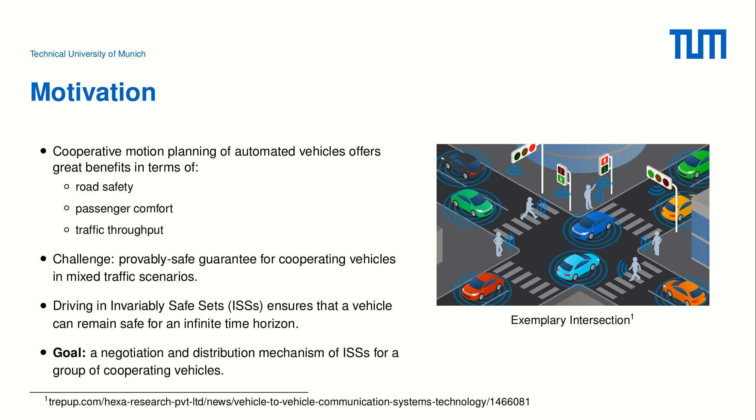Before proceeding to our method, we first introduce related definitions as preliminaries. In this work, the ISS of vehicles are computed over their individual reachable set, which is the set of all states that can be reached starting from an initial set of states. A state of a vehicle includes longitudinal and lateral positions, velocities, and accelerations in the road network.

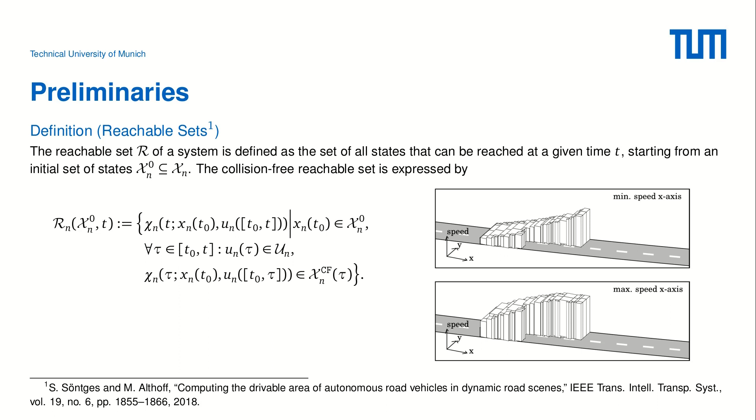The collision-free reachable set that does not collide with the occupancies of other traffic participants is expressed by the following formula. A snapshot of an exemplary reachable set is shown in the figure. The reachable sets of vehicles are projected onto the position domain to retrieve the longitudinal and lateral positions, which are called the drivable area. In the illustration, you may observe the drivable area of the ego vehicle over time, depicted by axis-aligned rectangles.

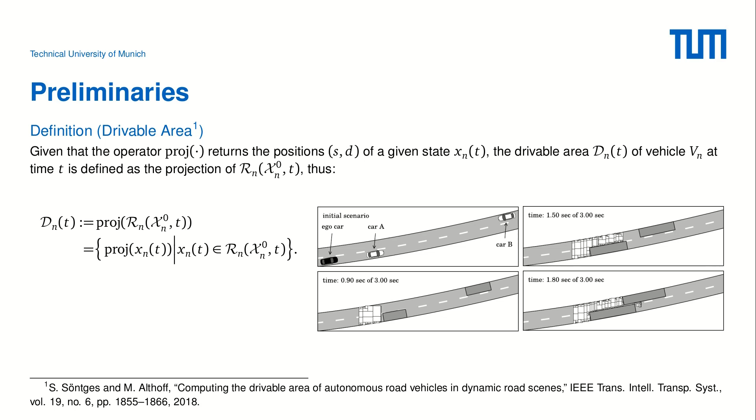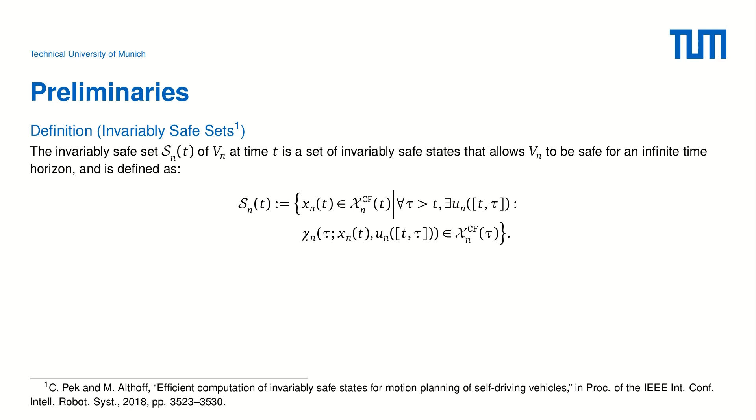Next, we introduce the notion of invariably safe sets. Consider the case that a vehicle is driving with a high velocity towards a static obstacle in near distance. Although the vehicle is in a collision-free state at the current time, it will eventually collide with the obstacle. To formally ensure its safety, we therefore require the vehicle to be at an invariably safe state. The ISS of a vehicle is the set of invariably safe states that allow the vehicle to remain safe for an infinite time horizon. In most cases, determining the maximal ISS is a computationally intensive task.

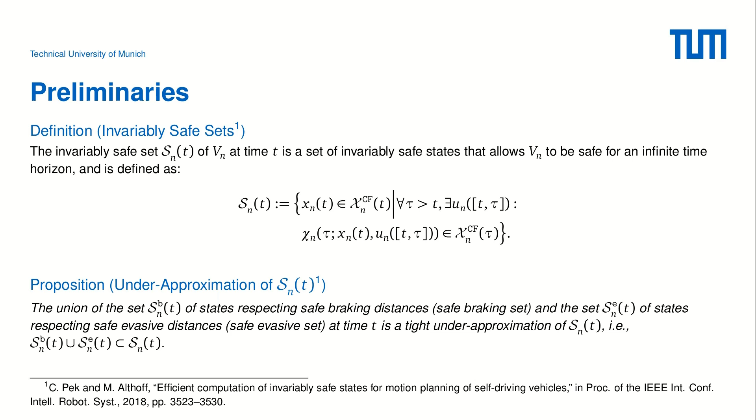Nonetheless, its tight under-approximation can be efficiently derived using sets of safe states that respect the safe braking distances and safe evasive distances respectively. These sets ensure the safety of the ego vehicle even if its preceding and following obstacles brake or accelerate with their maximal capability.

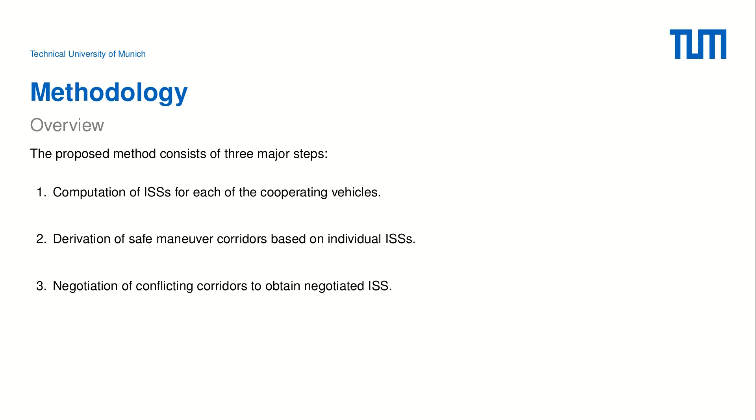Our method for provably safe cooperative driving consists of three major steps. Step 1: computation of ISS for each of the cooperating vehicles. In Step 2, we derive the safe maneuver corridors for vehicles based on their individual ISS. The potential conflicts of corridors are also examined in this step. Lastly, in Step 3, we negotiate and distribute the conflicting corridors so that in the end every vehicle obtains a negotiated ISS in which to plan their motion.

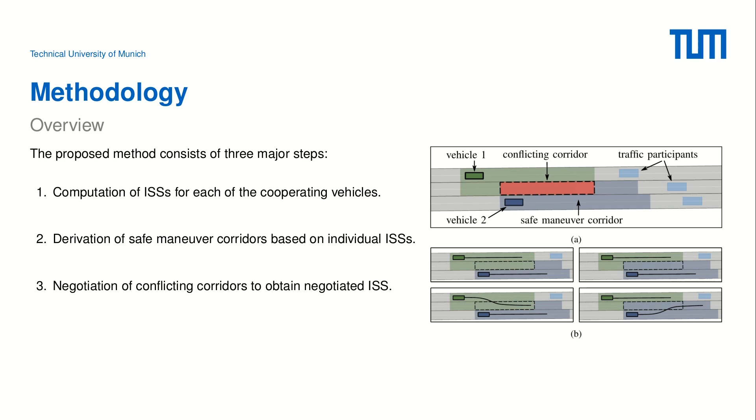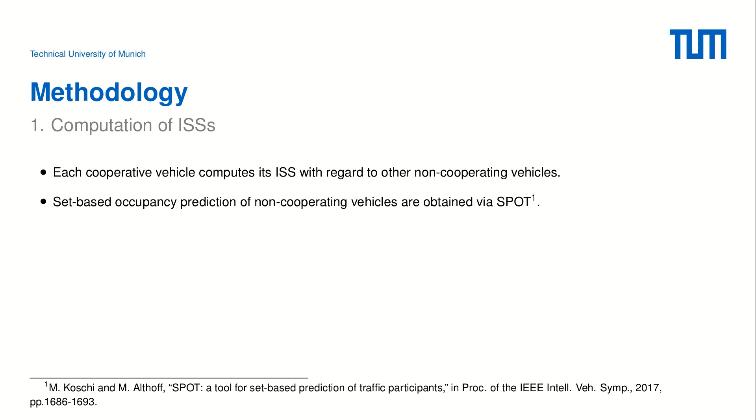The ISS of each cooperative vehicle is computed with regard to the future occupancies of other non-cooperating vehicles. These occupancies are obtained with the help of a set-based occupancy prediction tool named SPOT, which captures all feasible behaviors of other vehicles. Here we show the construction of the safe braking set and the safe evasive set for a vehicle driving in a lane.

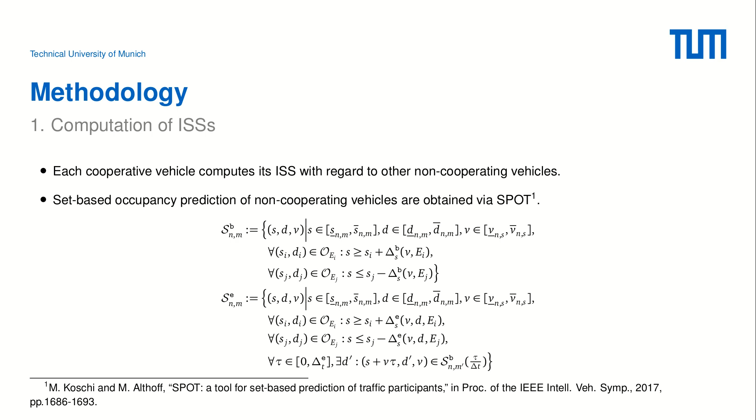This is better illustrated with a figure. A vehicle has a drivable area covering lanes 1 and 2. In lane 1, it has a preceding vehicle and a following vehicle. The boundaries of the safe braking set and safe evasive set are depicted with solid and dashed lines respectively.

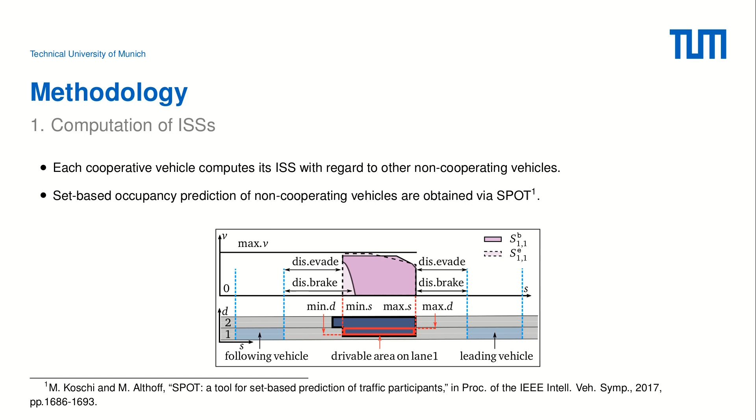The potential future collisions between the cooperative vehicles can be detected by examining the space and time required by the vehicles to perform safe braking or safe evasive maneuvers starting from their respective ISS.

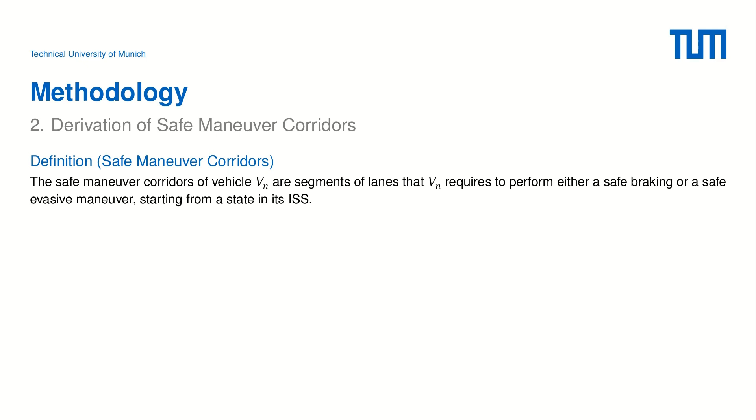This is referred to as their safe maneuver corridors, similar to the notion of a driving corridor, except that the initial state of such a corridor should be within the ISS. For computation efficiency in detecting conflicts, we obtained a bounding box of the computed safe maneuver corridors. In the figure on the right, the two vehicles have conflicts of maneuver corridors in the middle lane, which forbids them to perform an evasive maneuver.

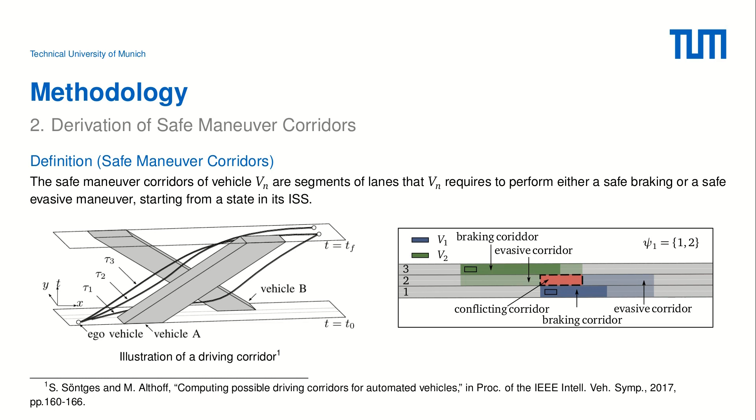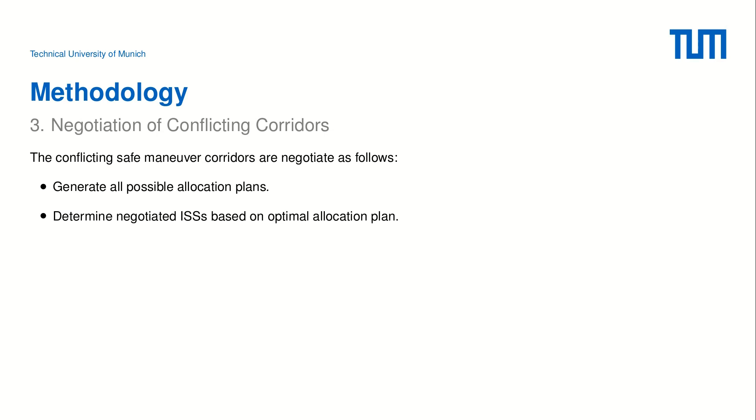Next, we explain the negotiation of conflicting corridors. Firstly, we generate all possible plans to allocate these corridors to vehicles. In this figure, two conflicts between three vehicles are detected. Note that the first conflict happens between vehicles 1 and 2, and a second conflict between vehicles 1 and 3.

By taking the Cartesian product of the coalitions, a total of 4 possible allocation plans can be generated. Each element in the plan denotes the winner of the corresponding conflicting corridor. Given an allocation plan, those states within the ISS of the losing vehicle whose safe maneuver corridor intersects with the allocated corridor shall be removed, resulting in a reduced negotiated ISS.

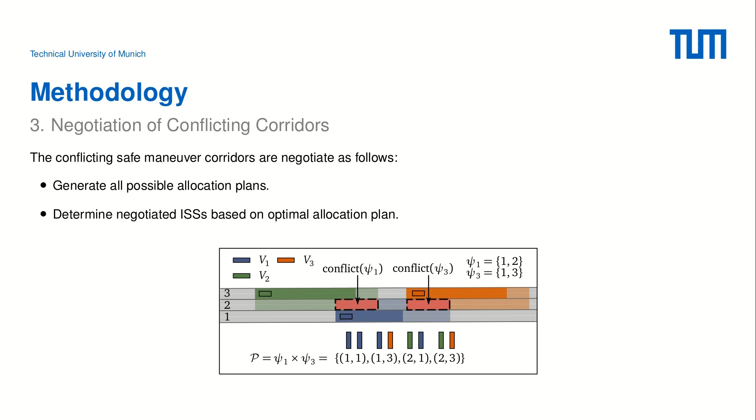After this, we compute the cost associated with each plan. The adopted cost function includes 2 terms. The first term represents the variance of the volumes of the negotiated ISS of vehicles with respect to Plan P, which reflects the fairness of the allocation plan. In the best case, this term equals 0, implying that all of the cooperative vehicles received equally large ISS.

The second term sums up the maximum length of the corridors of each vehicle, which promotes the overall advances in the driving direction. These 2 terms are associated with a user-defined weighting factor. After evaluating the cost of every possible plan, the one with the minimal cost is chosen as the optimal allocation plan.

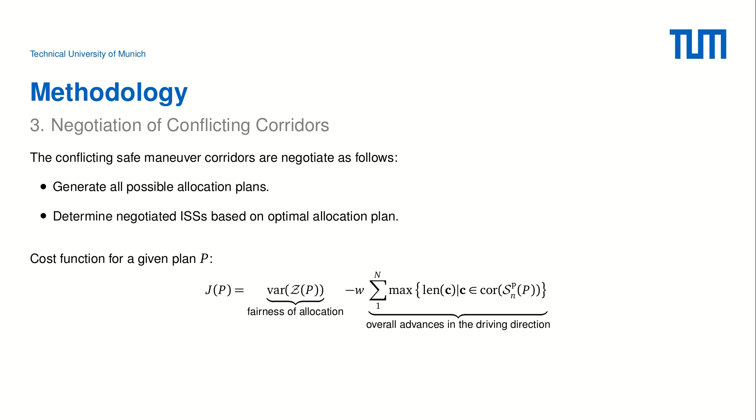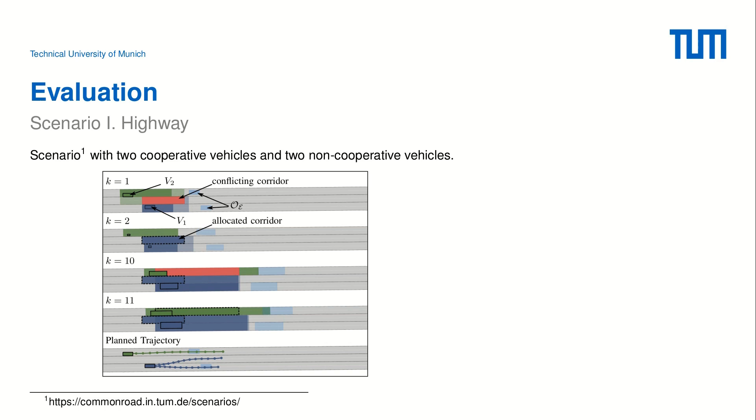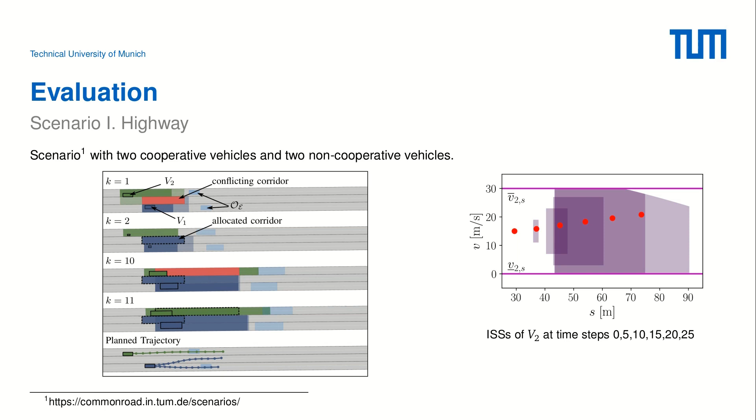The figure on the right visualizes the negotiated ISS and the states of the planned trajectories of vehicle 2. As can be seen, its states are all within the negotiated ISS, thus safety is ensured. Alternatively, one can only use the negotiated ISS in the last time step if the safety within the planning cycle is already ensured by the motion planners.

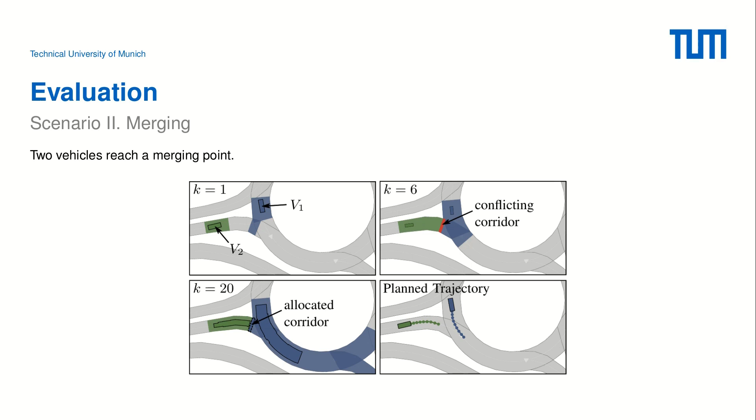In the second scenario, V1 and V2 approach a merging point at the roundabout. Note that for complex road geometries, the maneuver corridors of vehicles are projected onto the intersecting lanes to compute the conflicts. V1 gets the conflicting corridor allocated at time step 6, and hence is entitled to keep driving along its lane in the subsequent time steps. On the other hand, the ISS of V2 is constrained to remain right in front of the merging point before V1 passes through.

Our last scenario demonstrates a safety-critical situation. A truck driving in the rightmost lane had an accident, causing it to block the two rightmost lanes. V1 is already too close to the truck to perform a safe braking maneuver. The only way that V1 can remain safe is to perform an evasive maneuver with the help of V2. Even in such a critical situation, our method can determine the correct coordination between V1 and V2 to ensure safety. Similar situations can arise due to the presence of unexpected pedestrians, construction sites on roads, and so on.

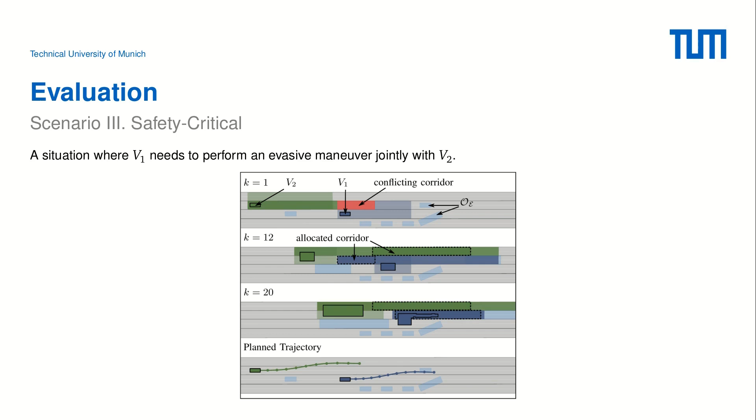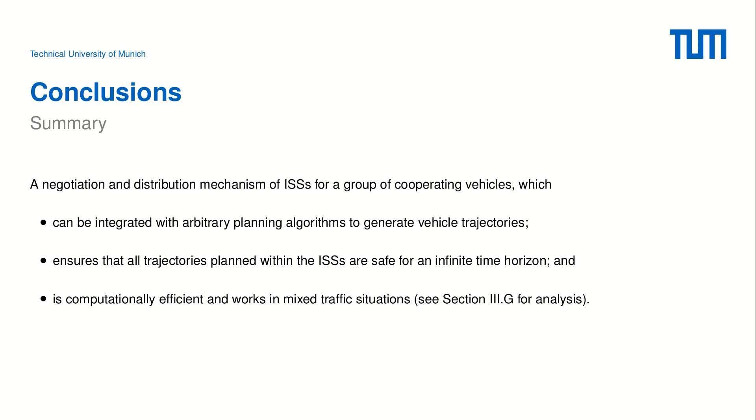To conclude, we have proposed a negotiation and distribution mechanism of ISS for a group of cooperating vehicles, which can be integrated with arbitrary planning algorithms to generate vehicle trajectories, ensures the safety of the group for an infinite time horizon, and is computationally efficient and works in mixed traffic situations. With different scenarios, we demonstrate that our method ensures the overall safety of the cooperative group, while not overly restricting the set of possible trajectories for the vehicles.

Possible future work and extensions include devising a more sophisticated cost function to account for more realistic factors on roads, validating the proposed method on a large amount of test scenarios for statistical analysis, and also considering other aspects of safety, for example, formalized traffic rules.